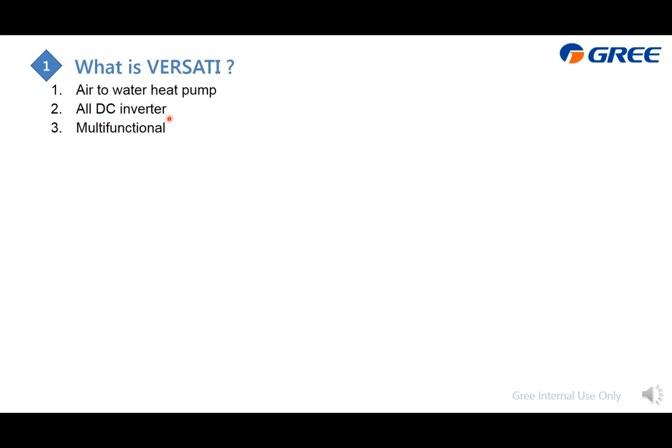First of all, what is VERSATI? It has these three features. First is air-to-water heat pump. That means we can heat up or cool down the water by the heat pump. The next is all DC inverter, meaning not only the compressor but also the fans are DC inverter. The last, it is multifunctional. That means not only space cooling and heating by the water, we can also produce domestic hot water.

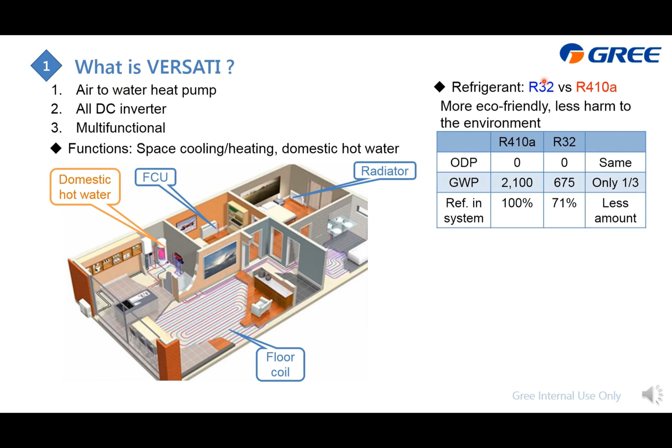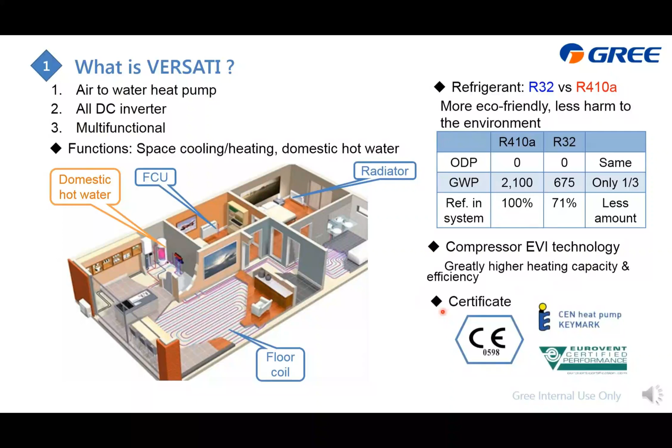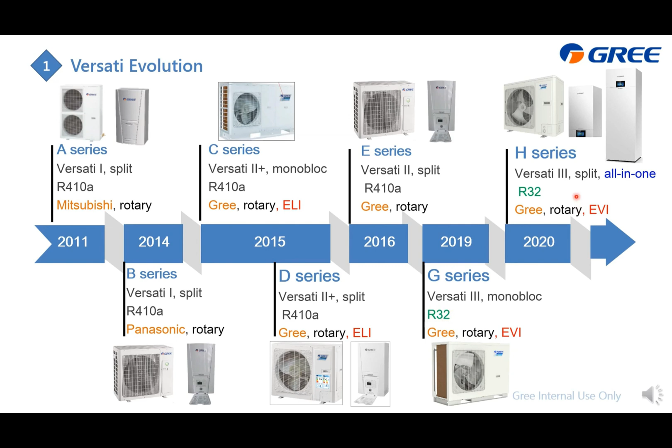For the VERSATI, basically, we have three types of series. The first is the split type. What we split is the outdoor unit and the hydro box. Next is the all-in-one. What we call all-in-one is we combine the water tank with the hydro box together. So with this one, we can offer domestic hot water. You can take a shower or supply the floor heating or the FCU.

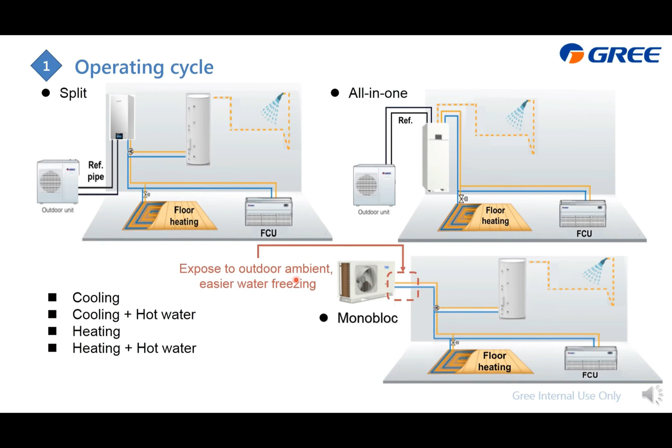As for the monoblock, it is easiest for the installer because it just needs to install the water cycle. And the disadvantage of this one is this part is exposed outdoors, which may lead to freezing. So just pay attention to here. And all these three can do cooling, cooling plus domestic hot water, or heating plus domestic hot water.

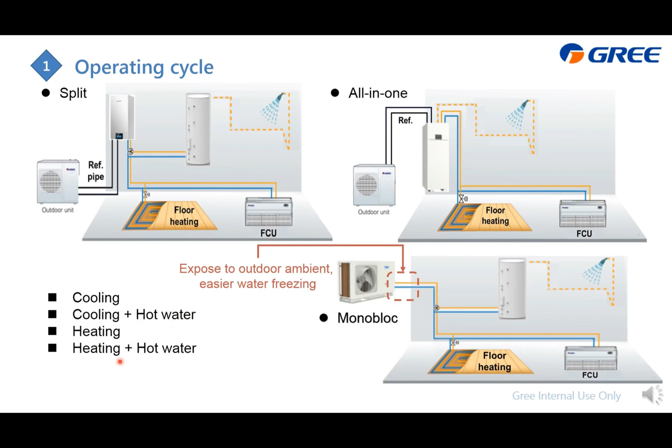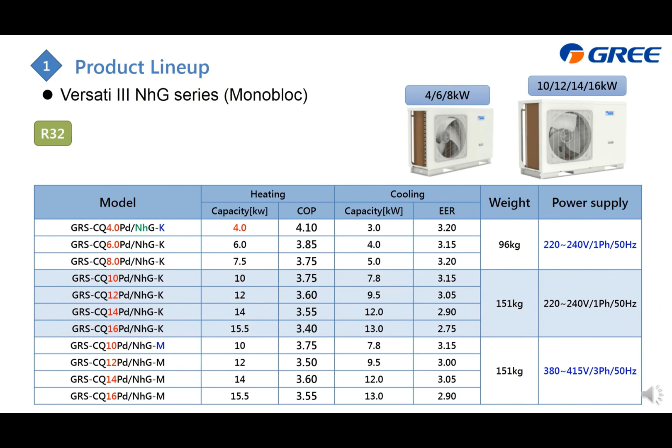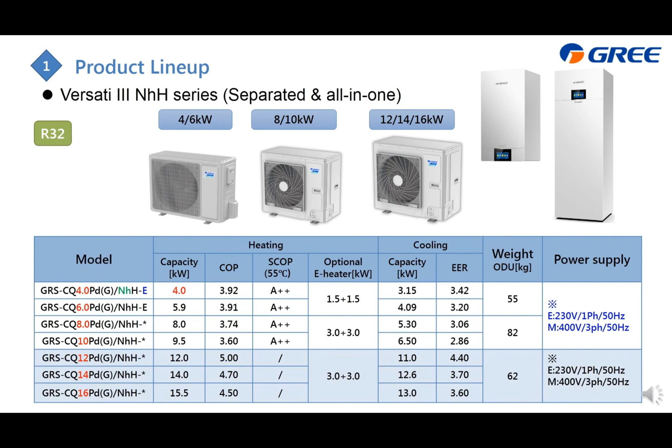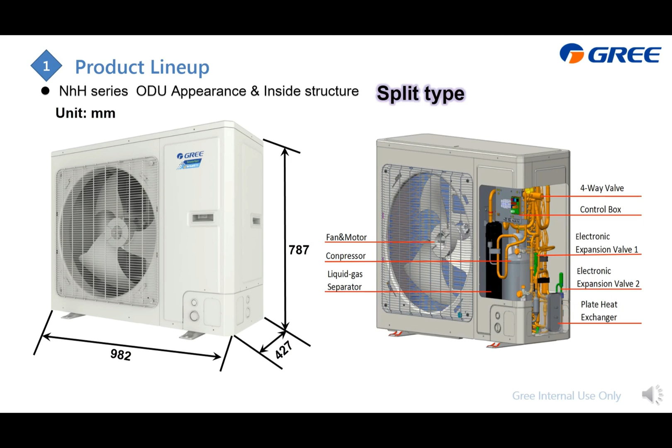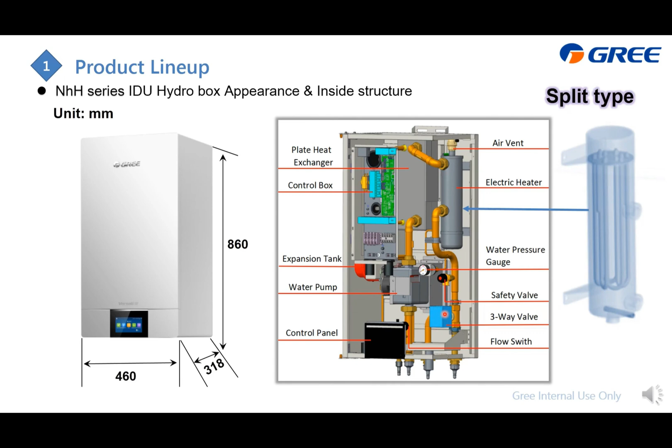Following this one, we have the pressure gauge to check the water pressure, the safety valve to ensure the inside water pressure is not higher than the preset value, and a three-way valve to control whether to conduct the hot water to the DHW or the floor coils. And here is the flow switch.